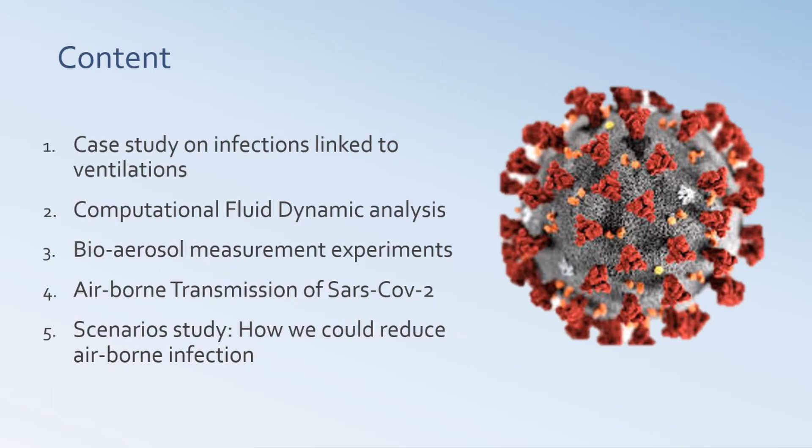For infection case 1, it was reported at a choir practice for the length of 2.5 hours. There were 61 participants in this choir practice. It was found that 32 cases were positive and 2 persons died. The singing activity itself contributed to the transmission through the spreading of aerosols and droplets.

The data from the study suggested there were several super emitters that caused broad transmission, which is the singing activity itself, and it was suggested that among these people, there were some who released extraordinarily more aerosols that contributed to the super spreading events.

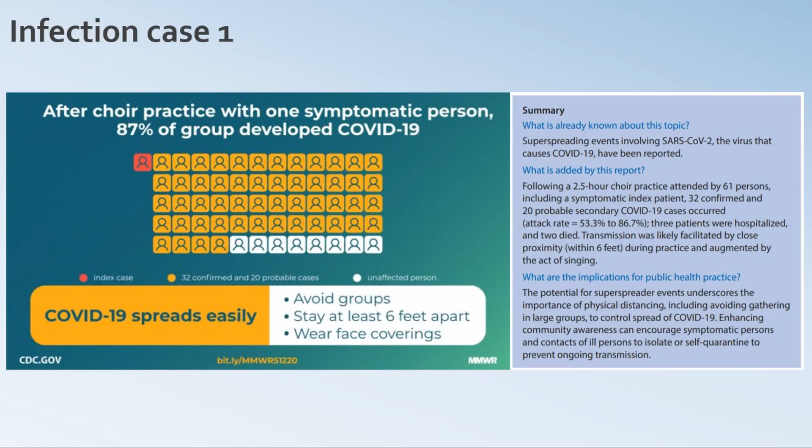Infection case number 2 took place in a restaurant in Guangzhou, China. 83 persons were at the restaurant. Out of that number, 10 were ill and positive, and 73 others were close contacts, so they were quarantined for 14 days. During the quarantine period of 14 days, it was found that these close contact people had no symptoms and no infections.

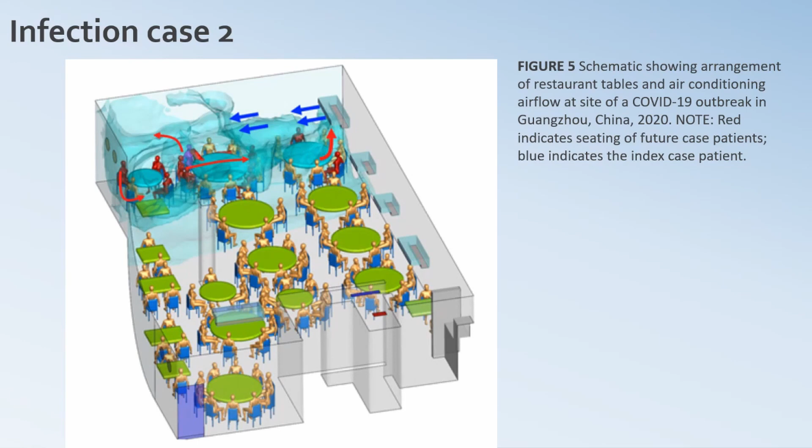In the next case, infection case 3, there were 4 key factors that drove the spreading. Number 1 is proximity. Number 2, prolonged contact. Number 3, numerous people. And number 4, enclosed space.

In this case, staff at a call center in South Korea worked together in 13 workstations located around the middle here. Out of that group, 9 were tested positive. In this big office, there were 137 workers. After that, it was found that 79 workers were positive.

However, on the same floor, there were other rooms and offices too. It was found that people in other spaces were far less infected. This has shown that confined space could lead to higher infections.

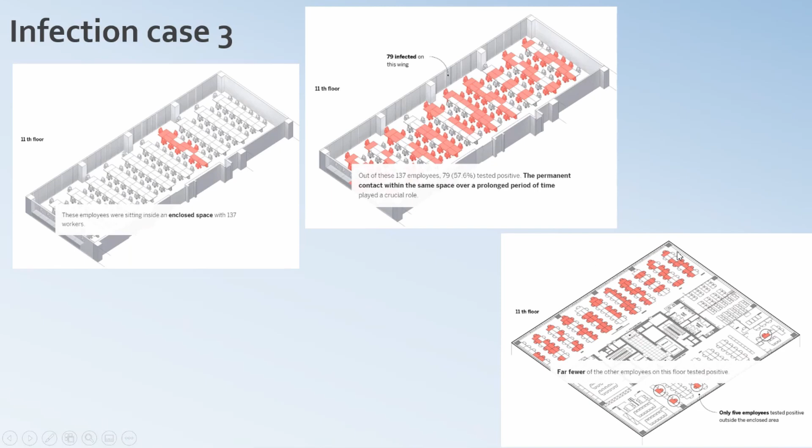In infection case study number 4, at a ceremony, 2 buses were used to transport people for a trip of about 100 minutes. 1 woman on 1 bus was infected without any symptoms. However, the next day, she showed some symptoms, and on that same bus, 23 passengers were infected. Despite their interaction at the ceremony, no person with illness was found on the other bus. So this phenomenon suggested that the infection was due to the aircon recirculation mode.

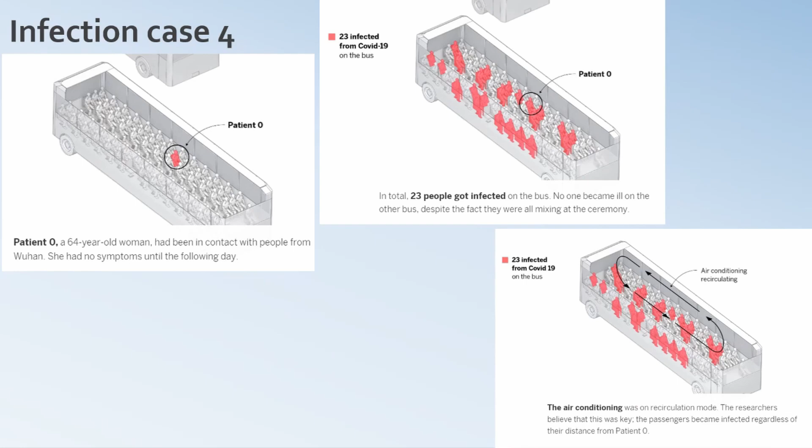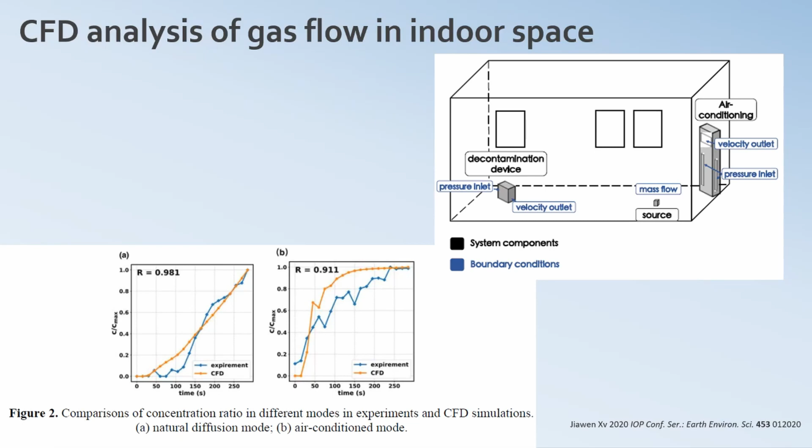This particular paper studies the simulation of computational fluid dynamics analysis on gas flow in an indoor space. I think this study could show that we can create a safe zone indoors, so that if we want to apply this in the current pandemic, it could be a fundamental reference.

In a natural diffusion flow, we can see that if a certain source of flow could be created, we can see from the flow study over here that a certain area in that room could be designated as a safe area.

Even in the case that aircon was turned on, still, if somehow a flow could be intervened in that room, a safe area still could be confirmed.

Dr. Ridha, can you maybe explain what are the red color and the blue color? Some people might not understand. Okay, sorry. Okay, the red color is showing, on this natural flow, so we can see that the red color over here is the origin of the contaminants, or in this case we could say maybe the source of the virus, or maybe in a clinic setup we can say maybe the patient is sitting here.

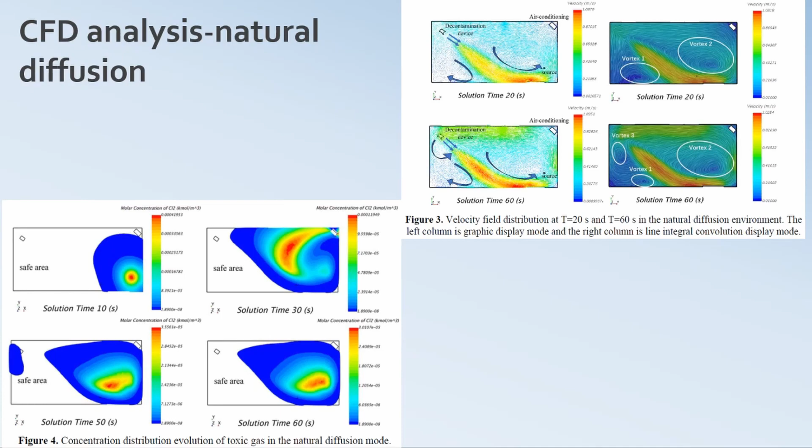Okay, so maybe we can set the aircon direction, or maybe a decontamination apparatus at a certain direction, so that this area could be controlled. Similarly, if you have an air conditioner on, that particular device could be pointed at a certain direction. Based on this analysis, it has shown that the door, or maybe the doctor and nurses, could always be present at the safe area. In a case that a patient or the contaminant exists in that room, based on the positioning and the direction, we could create a safe area in an indoor space.

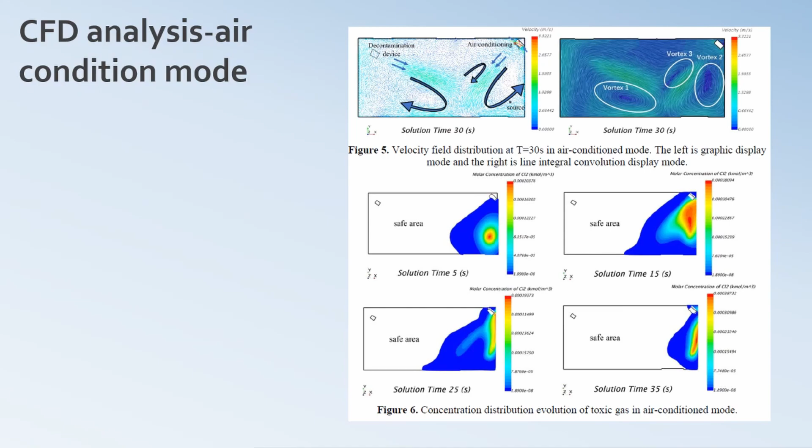Okay, the next study is a little bit backdated, in 2014. It's just showing how aerosol measurement was measured in an experiment. Images from the cloud released by a cough event at figure A, 0.006 seconds, B 0.01, C 0.029, and 0.106 seconds. And then figure E is showing the ballistic trajectory of the largest droplets during cough, and figure F is a smoke visualization of the motion of the gas phase recorded at 2000 frames per second during the cough.

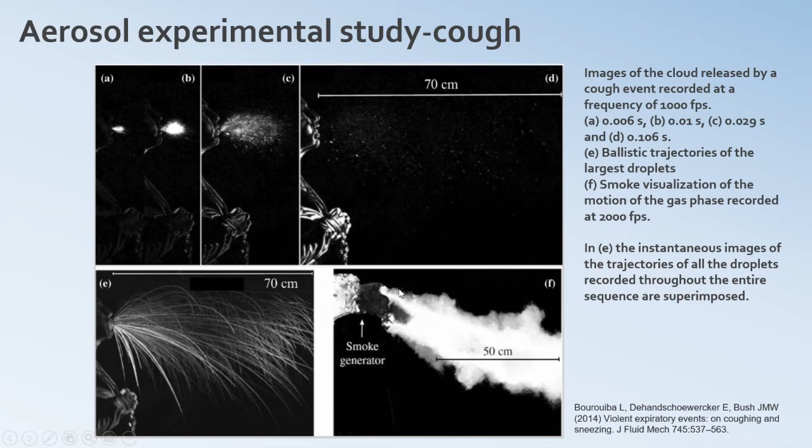Okay, and then the next slide is showing the aerosol measurement experiment during sneeze. A person is sneezing, so we can see flows from homogeneous fluid from a local source are categorized into 4: jet, puff, plumes, and thermal. So we can see the difference for jet and plumes is that it originated from the same source, which is the person's mouth. It carries a momentum from the cough, from the sneezing itself, and then as the aerosols or the droplets fly, it creates a plume movement, which is from the buoyancy or the excess of gravity due to the density differences.

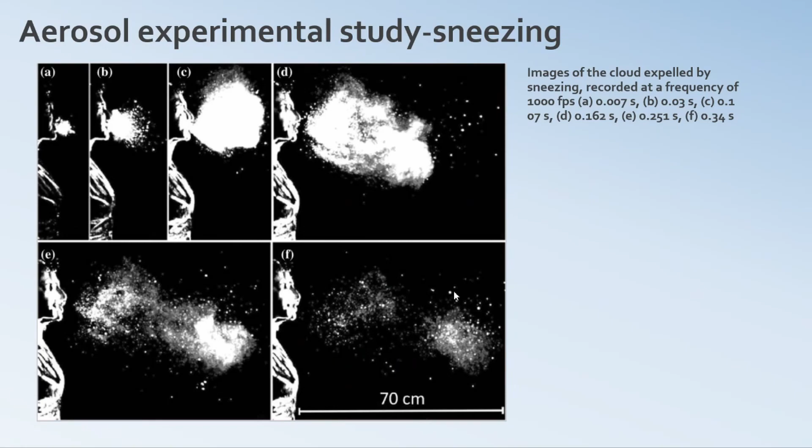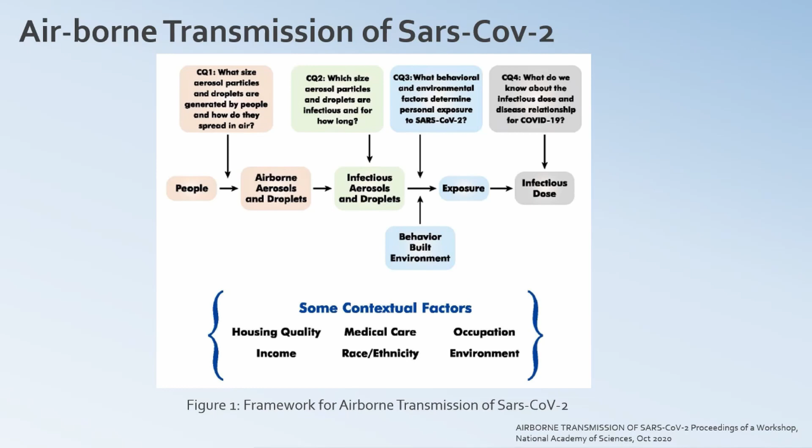Okay, the airborne transmission of SARS-CoV-2 framework is used in this workshop over here. Factors such as aerosols, droplets, exposure time, infectious doses, and environment are the main factors. 4 categories of intervention pointed out are: number 1, the source control, where the origins could be reduced, if not completely eliminated, then we could prevent the disease from further spreading.

And number 2, the use of an effective ventilation system, okay, the control of airflow in and out of the building. This is very important. And this ventilation system consists of a filtration system that could filter the aerosols or the droplets by HEPA or ULPA filters. And then the third one is the maintaining of distance and the use of personal protective equipment. Okay, these interventions can offer protection by reducing a person's exposure. The final intervention would be the maintaining of hygiene.

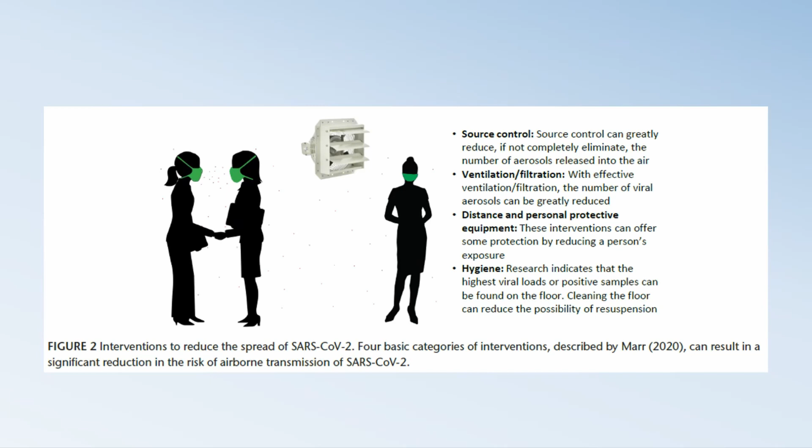Research indicates that the highest viral loads or positive samples can be found on the floor. Therefore, the practice to keep the space, especially the floor, clean is very important. In the scenario here, I want to show you a simulation study in a bar, in the case that we implement the use of masks by every person and whether the room has good ventilation or not. For a case here, in a bar or in a restaurant where there is one patient, after 4 hours without any safety measures, this one patient could transmit the virus to all of the other people in the bar by the aerosols.